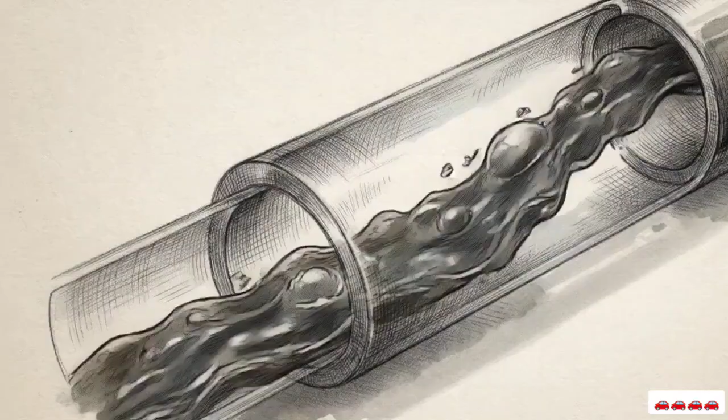Disruptions to global oil supply chains frequently expose a persistent vulnerability in how we move. Our mobility currently relies on the physical movement of fuel across vast distances. Internal combustion engines are tied to this mature but fragile refueling network. Without a constant flow from these global pipelines, the system stops.

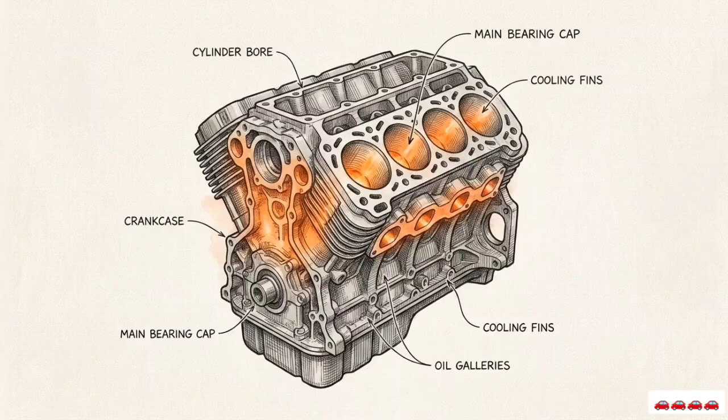Viewed on the assembly line, the traditional engine is a marvel of self-contained mechanical engineering. It is designed to carry its own energy and convert it locally. This architecture means the vehicle's performance is largely insulated from external variability. Once the fuel is on board, the machine operates independently of the wider system.

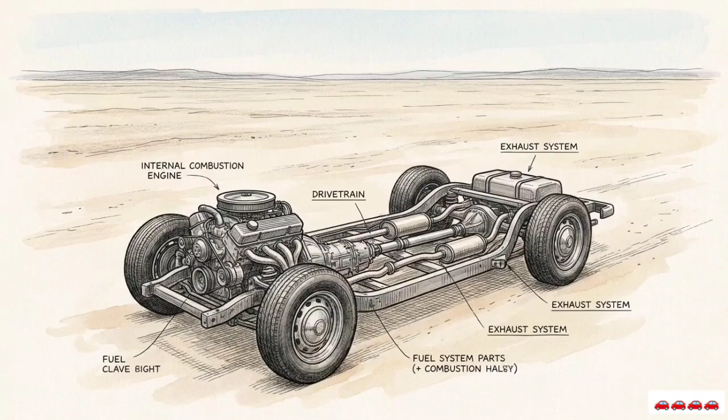Electric vehicles represent the primary technical response to this fuel instability. But this transition is a complete redefinition of how energy is produced and consumed. It turns the vehicle from a self-contained machine into a node within a broader energy ecosystem.

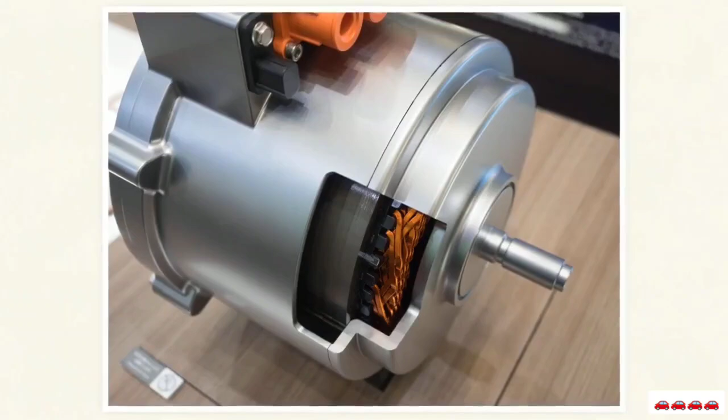At the component level, electric motors are significantly simpler than combustion engines. They rely on basic internal copper windings rather than thousands of reciprocating parts. This mechanical simplicity provides immediate advantages: higher efficiency, instantaneous torque, and fewer points of physical failure within the motor itself.

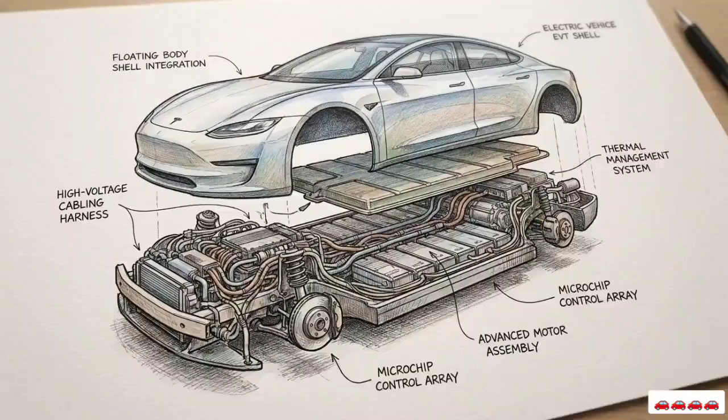However, that simplicity is an illusion. The engineering complexity hasn't disappeared, it has moved. EVs invert the traditional paradigm. Their performance is now directly tied to grid capacity, charging infrastructure, and energy pricing. The engineering boundary of the vehicle now integrates directly into the energy system.

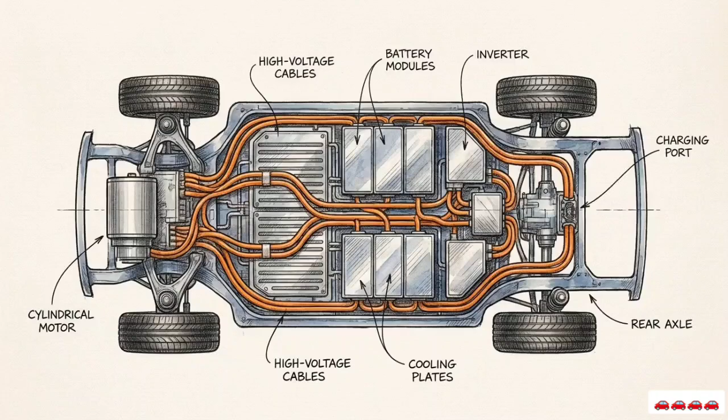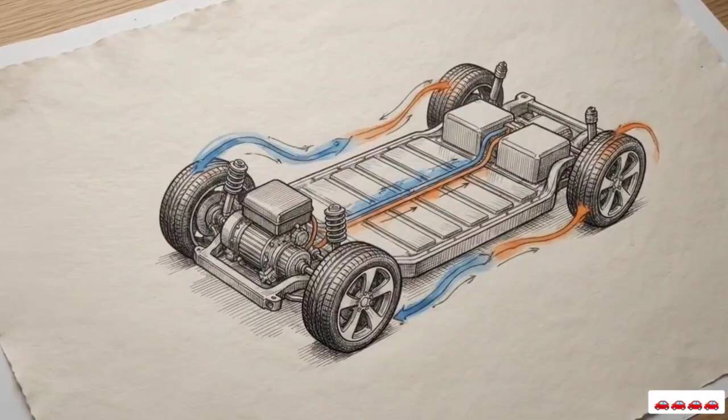While the motor is simple, the hardware required to manage the energy flow is not. Complexity now resides in the integration of high-voltage battery systems, power electronics, and thermal management architectures. Managing these systems requires sophisticated software control. Instead of mechanical linkages, we now rely on code to balance power draw and temperature in real time.

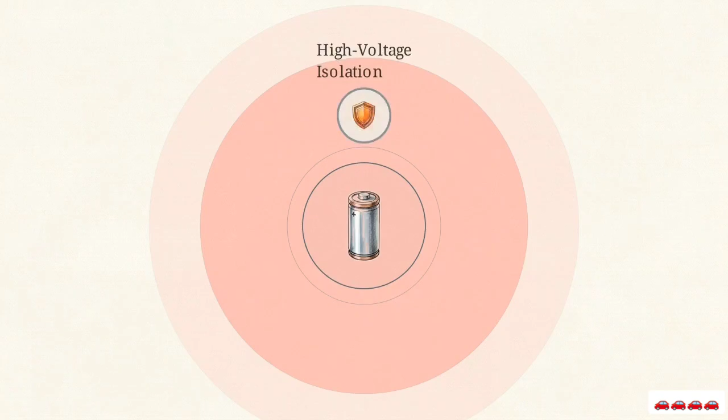This shift creates new requirements across the entire life cycle, from high-voltage isolation and thermal runaway mitigation to specialized recycling protocols for the battery cells. For automotive engineers, the primary internal challenge has moved from mechanical optimization toward complex system integration.

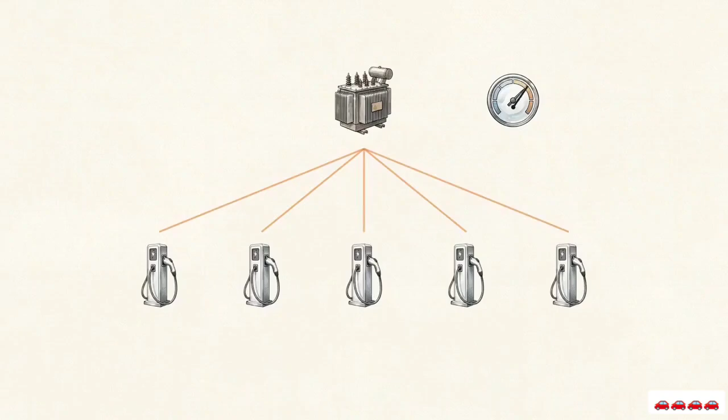The most significant system pressure occurs at the charging interface. This is where the vehicle's demand meets the physical limits of the electrical grid. To understand the scale of this load, consider that a single fast charger draws the equivalent load of dozens of residential homes. When many vehicles charge simultaneously, load coincidence occurs. Unmanaged, this concentrated demand can exceed the distribution system's capacity. This introduces immediate risks to physical infrastructure, including voltage instability and pushing local transformers to their thermal limits.

These grid constraints are a core design consideration. Engineers must treat the stability of the grid as a primary design constraint for the vehicles themselves. Because the car, the charger, and the grid are often managed by different companies, diagnosing a failure becomes difficult. If a vehicle won't charge, it could be a software error in the car, a hardware fault in the station, or a load-shedding event from the grid.

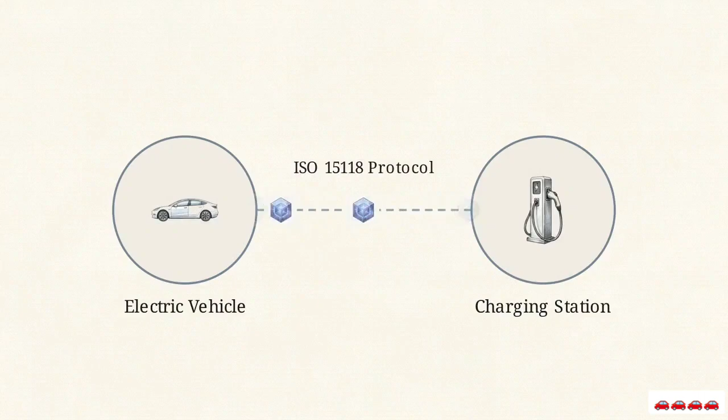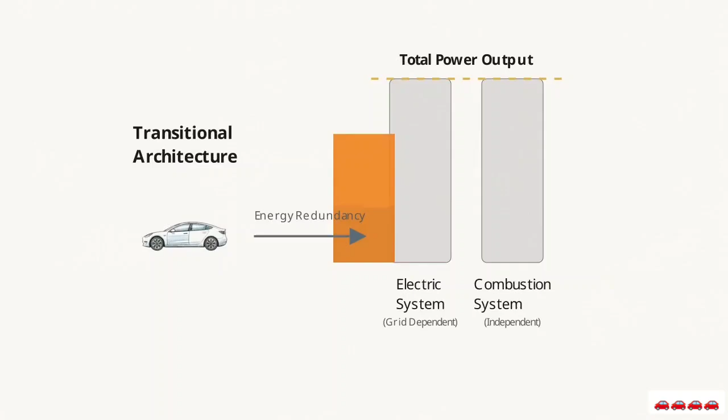Success in the EV transition depends as much on these communication standards and data protocols as it does on the chemistry of the batteries. The central challenge of this era is system ownership. Since the vehicle, the energy system, and the data platforms are controlled by different stakeholders, no single entity is responsible for the performance of the whole ecosystem.

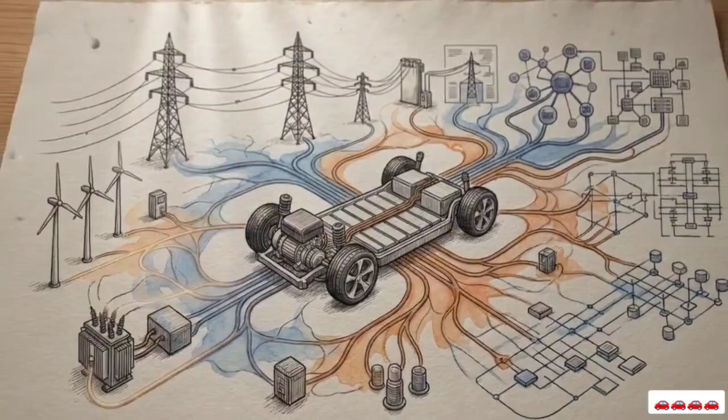Engineers are now required to design beyond the edges of the vehicle, using risk-based frameworks that account for these interconnected, fragmented domains. The technical case for electric vehicles, higher efficiency and reduced oil dependency, is well supported by data. However, the future of mobility depends on how well engineers can integrate these fragmented systems to work together.